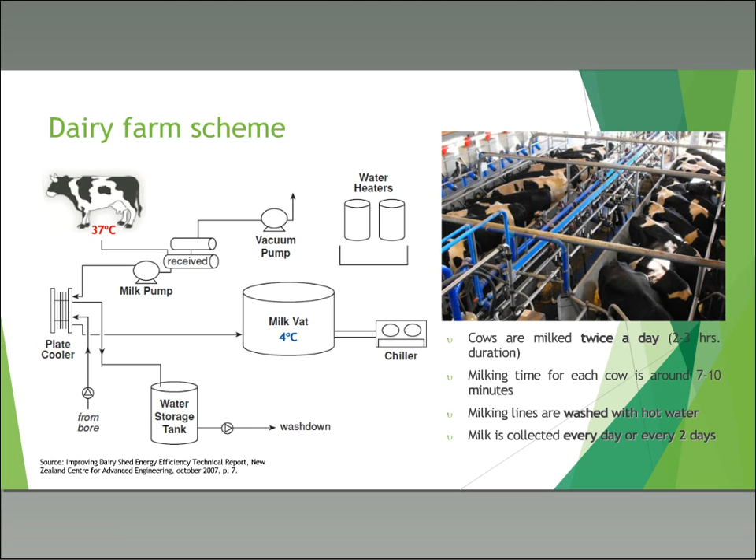And in the upper right part of the diagram, you see some water heaters. Those are the devices to heat the water to wash the lines. At the beginning of the project, we tried to quantify the specific energy intensity of these farms to design an EnPI, an energy performance indicator, as established by the standard ISO 50001. And we did so with this indicator: how many kilowatt hours per 1,000 liters of milk produced.

And we did it in 3 scales. The first one is for small farms, less than 1,000 liters a day of production. The median of this indicator for this range of dairy farm size is 81 kilowatt hours per 1,000 liters. The same for medium size dairy farms, between 1,000 and 3,000 liters per day: the median of this indicator is 51 kilowatt hours per kiloliter of milk production. And for large dairy farms, more than 3,000 liters a day of production, the median of this indicator is 42 kilowatt hours consumed per 1,000 liters of milk produced.

So with this indicator, we designed an energy efficiency labeling for dairy farms, to emulate the idea of domestic appliance labeling, that lets the farmers easily understand how well or badly they are consuming energy compared with the rest of the industry, like a benchmarking. We have to take into account that the farmers are people that are quite isolated in the middle of the countryside, sometimes with no access to consultants or specialists in energy efficiency.

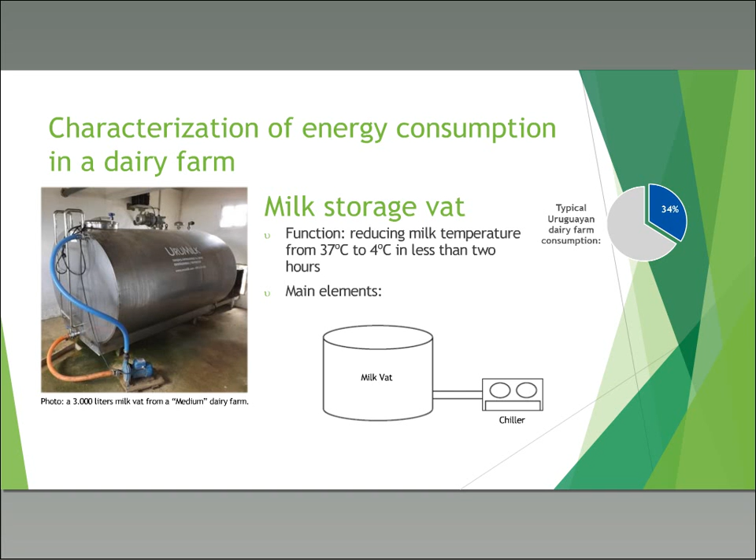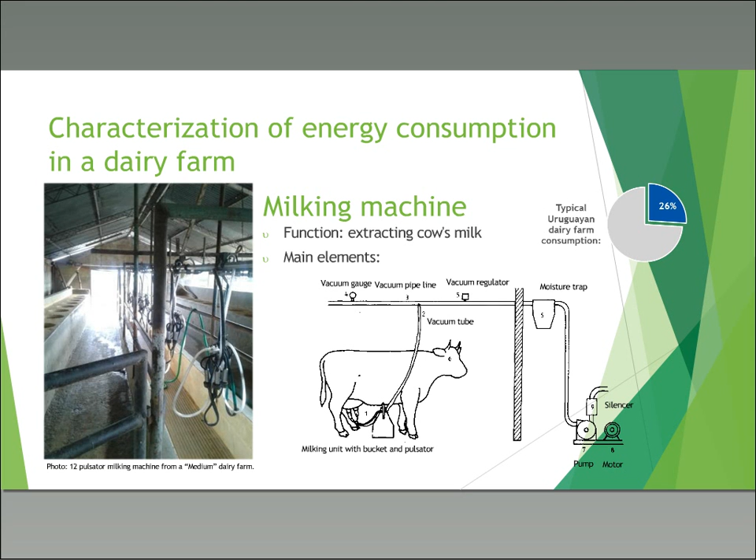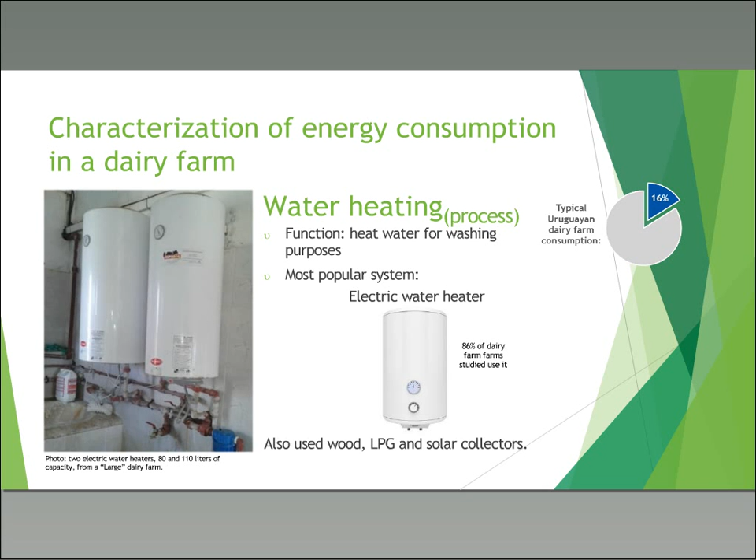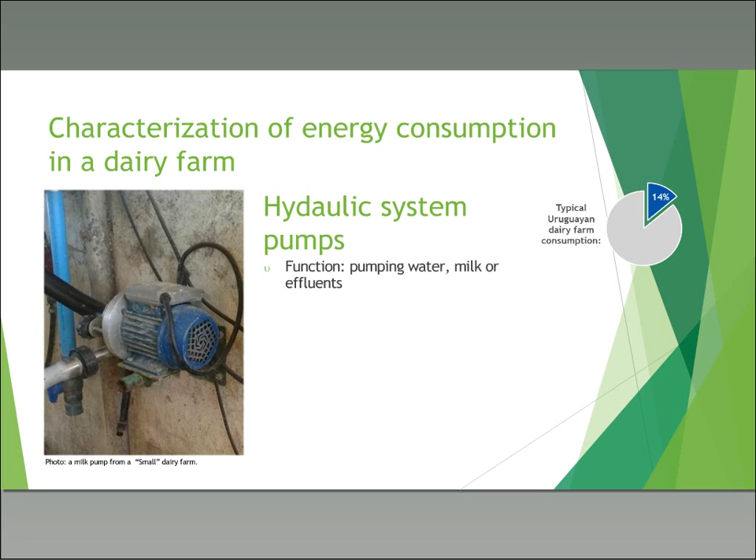The water heating process, to heat water for washing purposes. Typically, they use electric water heaters, but there are also some cases that use wood, LPG, or solar collectors, but mainly electric water heaters. And this explains, on average, 16% of the energy used in dairy farms. Other hydraulic system pumps for pumping water, milk, or effluents. This explains 14% of the energy consumption.

We have mild weather in Uruguay. Our average temperature around the whole year is 17 degrees. In New Zealand the climate is cooler, so they consume more in heating and less in cooling of the milk. So let me explain to you roughly the energy conservation measures. We call them ECMs, energy conservation measures, suggested as a result of the audits.

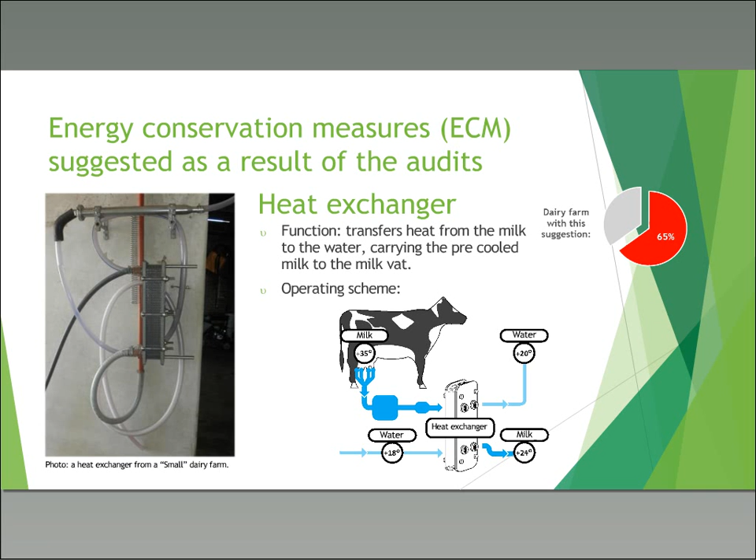And when we use a variable speed drive, it regulates the speed. That means the energy consumed with a sensor of depression, and we measured these savings in some cases, finding 64% of energy savings. It's a lot, but it's real.

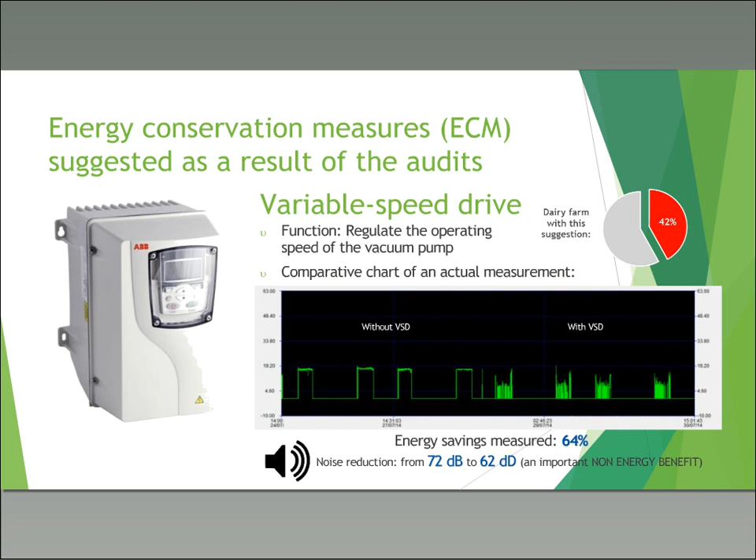The farmers that installed this technology told us that they were very happy, because the people working in the milking room were really happy to have this noise reduction. Of course, it's not an energy saving measure, but it's a non-energy benefit that was highly appreciated.

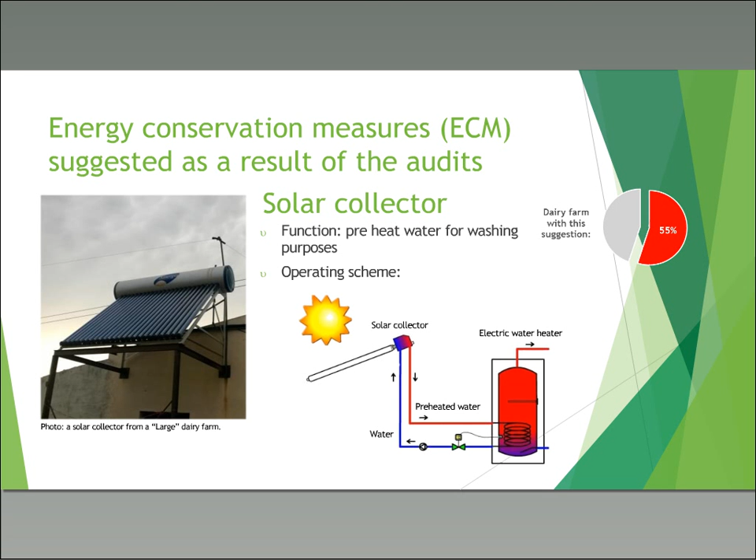Then the use of solar energy to preheat water for washing purposes. We suggested this idea in 55% of the cases. Then a very interesting technology called heat recovery tanks. The function is to preheat water for washing purposes also.

And if you see down at the right of the milk storage vat, you can see that the cooling unit uses a liquid or gas refrigerant that is compressed. It reaches a high temperature, and instead of rejecting all the heat through the air-cooled condenser, the hot refrigerant goes through a heat recovery tank with a heat exchanger, where it leaves some part of the heat and preheats the water and comes back to the condenser at a lower temperature.

So you have two benefits from this process. You preheat the water, sometimes to 70 degrees Celsius, that is enough for washing purposes, and at the same time you can save some electrical energy at the cooling system. This was suggested in 32% of the cases, also because it's a quite expensive technology, so it's more indicated for big farms, for large farms.

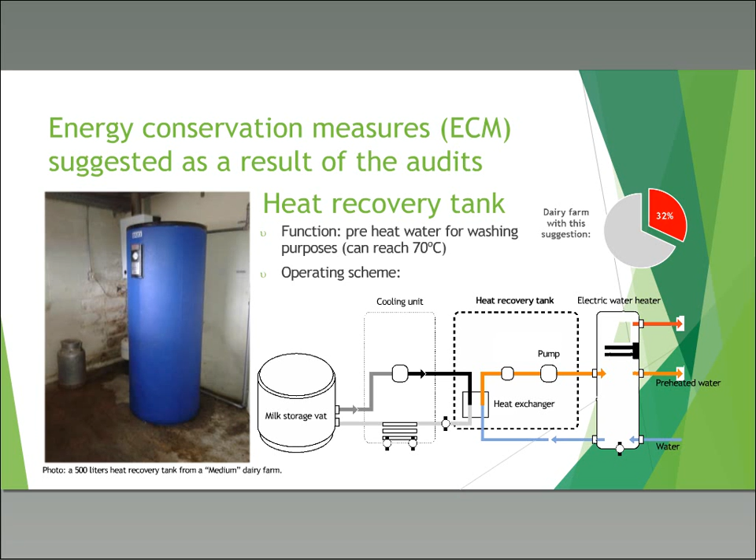This one is a very simple one, a timer to limit the operation of the electric water heater to avoid using it in times where the dairy farm is not operating at all, and to avoid peak hours when the rate is more expensive. We suggested this idea to 72% of the cases.

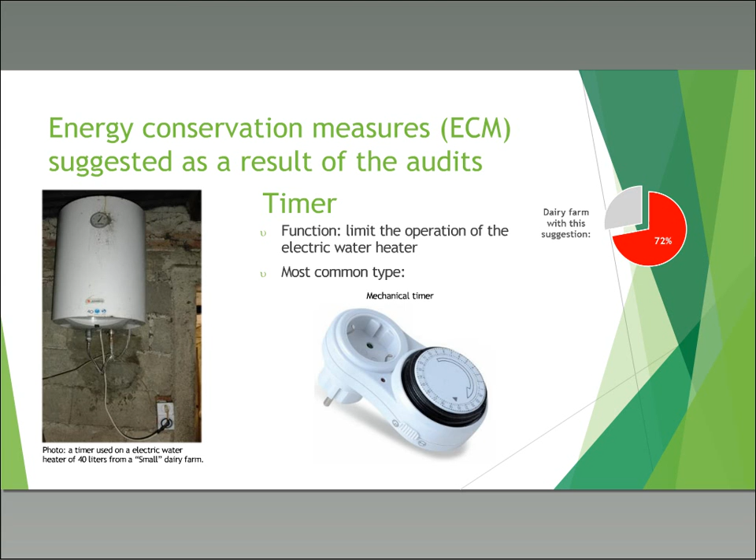And this is a summary of rates and power factor optimization suggested as a result of the audits. We can also save money without saving energy. That's very important for the economy of these energy efficiency studies. For example, the first one, electricity rates, to switch from simple rates to smart rates, where the energy has different prices depending on the time of usage, provides important savings in many cases. We suggested this to 30% of the cases.

To adjust the contracted demand, reducing or increasing the contracted demand in terms of the power hired to the electric company. And lastly, but very, very popular measure, the power factor correction by installation of capacitor banks to reduce reactive energy was suggested in 82% of the cases. It's very interesting to know that a lot of farms were paying penalties or fines to the electric company because they didn't know about this very simple way to reduce energy cost by installing capacitors to reduce reactive energy consumption.

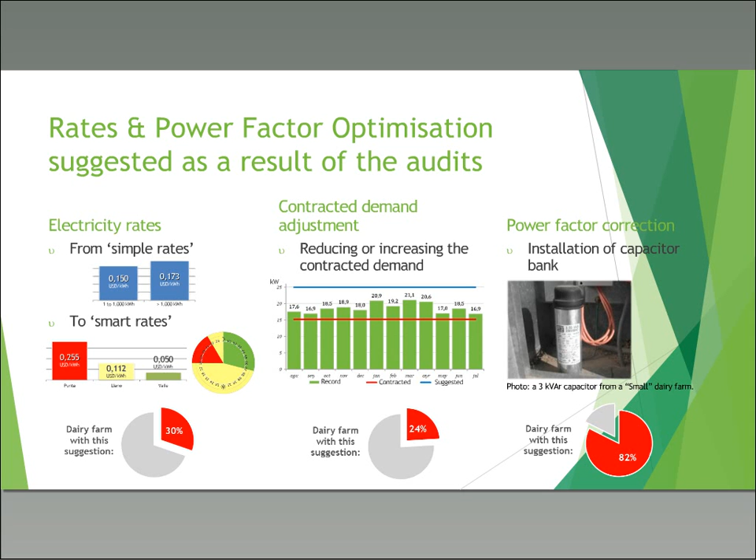We also took advantage of all this process to make some suggestions regarding electrical safety in the installations and capacity requirements of the dairy farms. For example, general safety conditions, sealed boards, the grounding; regarding capacity, suggestions to increase the milk vat tank capacity, increase the number of milking cups, increase hot water capacity. Some suggestions regarding capacity or safety, not only energy savings. That was an independent output of this project.

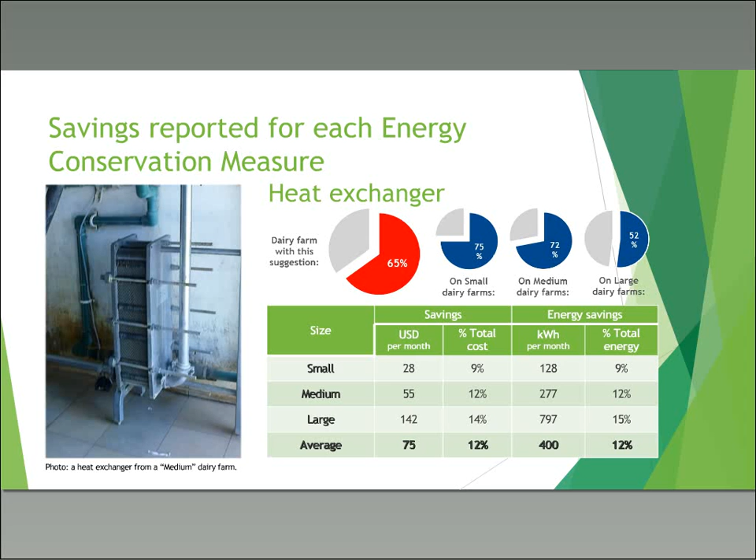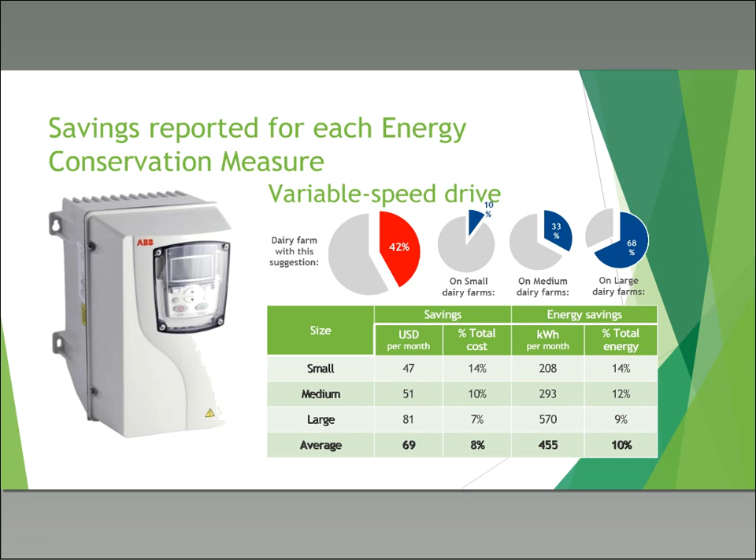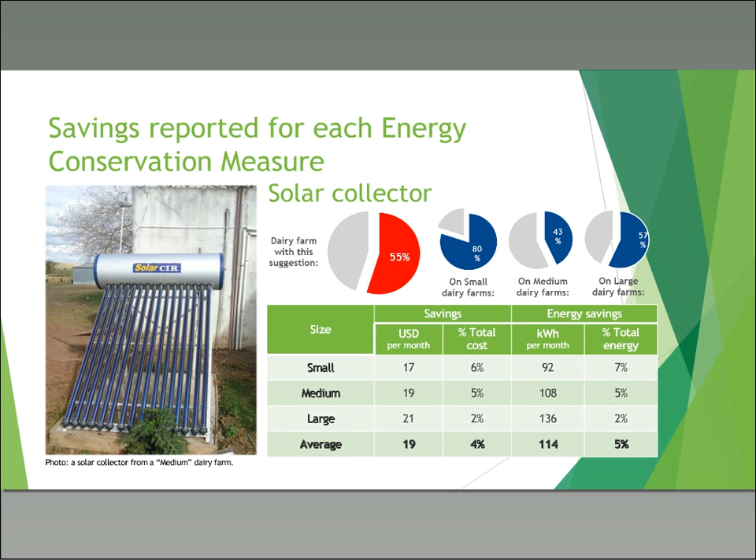This picture is repeated for each measure. I will go quickly through these slides. The variable speed drive, if you see, the average savings is around $69 per month and means 8% of energy cost savings. The solar panels, taking advantage of solar energy, save $19 per month, which means 4% savings.

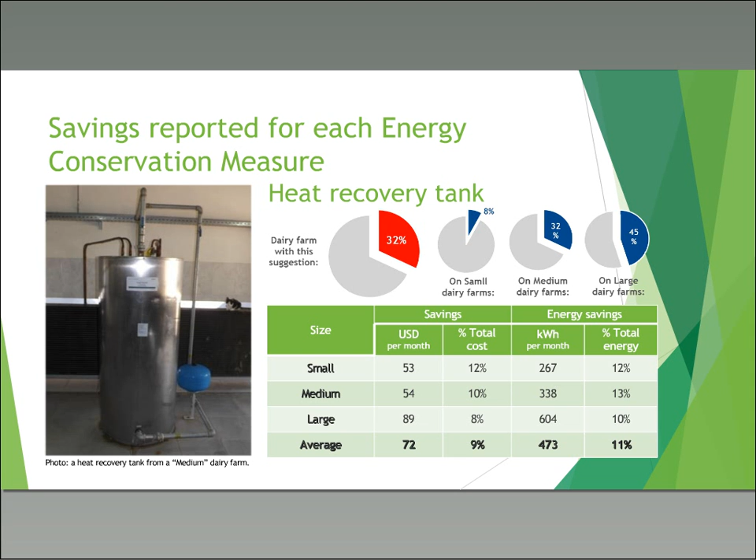The heat recovery tank can give savings on average of $72, which means 9% of savings. The timer is a very cost-effective measure because it's very cheap to install, and the average savings is around $13, which means 2% of savings.

And as a summary of the energy conservation measures reported for small dairy farms, first of all, let me tell you that the monthly average consumption is only 1,537 kilowatt hours per month. That means only $323 per month. This is the cost of electricity for these typical small dairy farms. And the rate on average is 21 cents per kilowatt hour.

We made in those cases an average of 11 suggestions, and the monthly savings are 246 kilowatt hours per month, which means 16% of the energy, but $134, which means 41% of the cost. This is because of all those measures that I told you that do not represent energy savings but cost savings, like reactive energy reduction or switching the time of the milking in order to take advantage of better rates and to use energy when the price is cheaper.